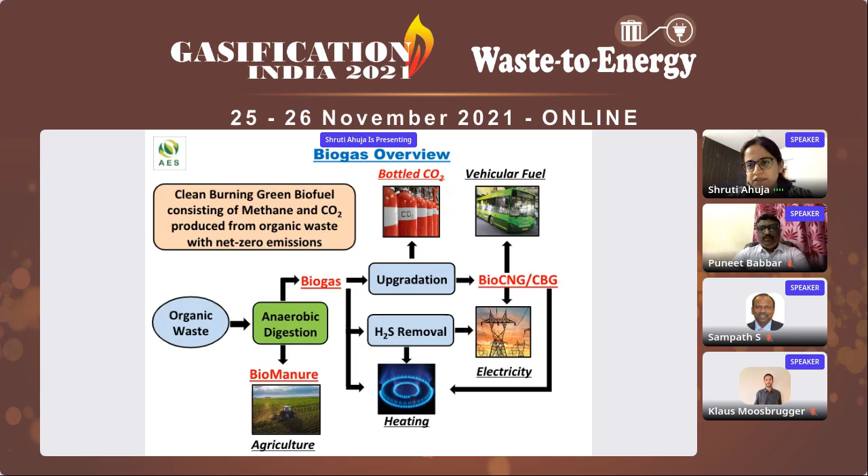During this entire conversion of organic waste into biogas, what we get is a byproduct, a very valuable byproduct, a very good value addition to this process, which is biomanure. And thanks to FCO, this biomanure, both in solid as well as liquid form, has been recognized as an organic fertilizer, which can be utilized as per norms, without any need for permissions, for agricultural purposes as well as for landscaping and various other applications that fertilizers are usually utilized for.

Now, there are various organic wastes available in our cities. I will talk about cities because I truly believe that cities are the ones who are responsible for the generation of maximum amount of waste. Our villages and I would say smaller towns are still extremely clean. They recycle a lot, and they waste a lot less than cities do.

I come from the city of Hyderabad, and we here generate at least 5,000 to 6,000 tons of municipal solid waste on a daily basis. And of course, cities like Bombay and Delhi generate a lot more, maybe close to 10,000 tons of MSW every day. So municipal solid waste, in very simple terms, is a combination of all kinds of wastes that are coming out of our homes, hospitals, institutions, offices, even vegetable market yards. Everything put together is called municipal solid waste.

Then a very interesting waste stream that is available in our cities, which is highly segregated and available in distributive fashion, is vegetable waste or vegetable mandi waste. And this is a space where we have already worked on commercial scale. So I would be very happy to show you all some snapshots of our vegetable waste management solution and how we are actually multiplying it. So this is a very important waste that needs to be treated and can in fact be treated in a much easier fashion when compared to MSW, which is highly diverse and unsegregated to a large extent.

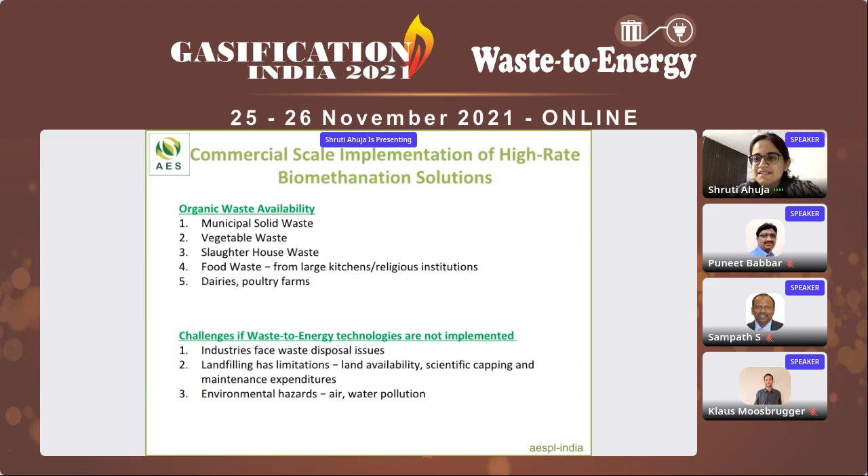I have put together a very simple presentation so that our audiences get a full gist of what these technologies can do. A little preview of what we do as a company. We are about 30 years old, and we've been into EPC and consulting. About 10 years back, we started working in this field of waste to energy and specifically biogas, and we have been doing it ever since.

We've been associated with the CSIR lab, IICT, Indian Institute of Chemical Technology. They have developed a technology which can treat a number of organic waste substrates and convert it into biogas and biomanure at various scales. What we have done is that we have licensed their technology and we have scaled it up. And now we are implementing these technologies on commercial scale.

We have about 20 plus operational plants across India, and we are working on a number of scales, a number of waste quantities. We have something as small as 100 kgs per day biogas plant to about 10 to 15 tons per day biogas plant as well. We have currently done lots of projects with food waste and kitchen waste. Again, that is at small to mid scale.

Mid scale is what we like to define as 500 kgs per day or 1 ton per day. And we have now also worked with municipal solid waste, landfill leachate at about 5 tons per day scale. About a year ago, we implemented a 10 tons per day vegetable market yard plant as well, where we treat vegetable waste and convert it into biogas power. So I will give you all a quick view of these projects, just to give you a perspective of what they really look like.

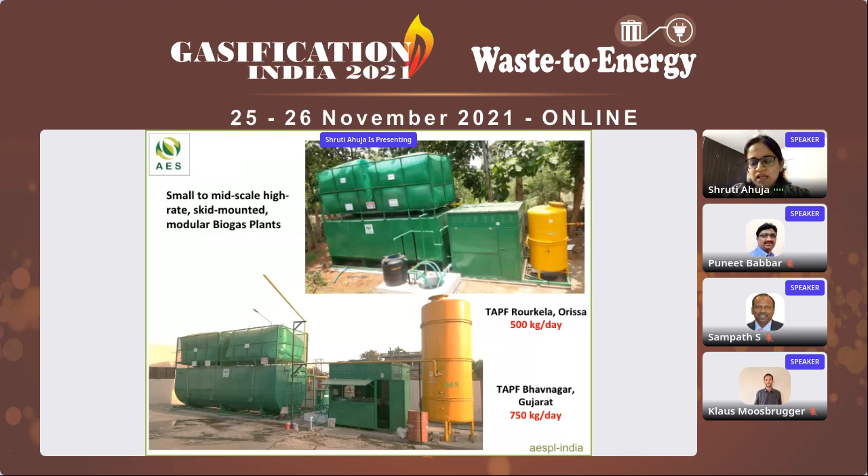Here we are treating municipal solid waste and landfill leachate on a daily basis, and we are generating biogas power. The power that is generated is being used in situ by the facility to run some electrical load like pumps and compressors and various other motors that they already have in line. These examples that I am showing you are all examples of distributive waste management.

We strongly feel this is part of the solution. I'm not saying that this is the way to go, but wherever waste is available in a segregated fashion, it really makes a lot of sense to set up these plants in a distributive fashion very close to the waste, because it results in a lot of advantages. One is your waste does not need to be transported. You are not sending your waste from point A to point B, then this dump site to the final dump site, and the final dump site then landfills this waste.

So the idea is to treat this waste in situ. If there are bulk organic waste generators, and if they are to set up their own plants, such as these, in their own backyards, then a lot of this waste, I would say potentially at least 10-20% of our organic wastes, which is now going to the landfill, can be treated scientifically through these methods.

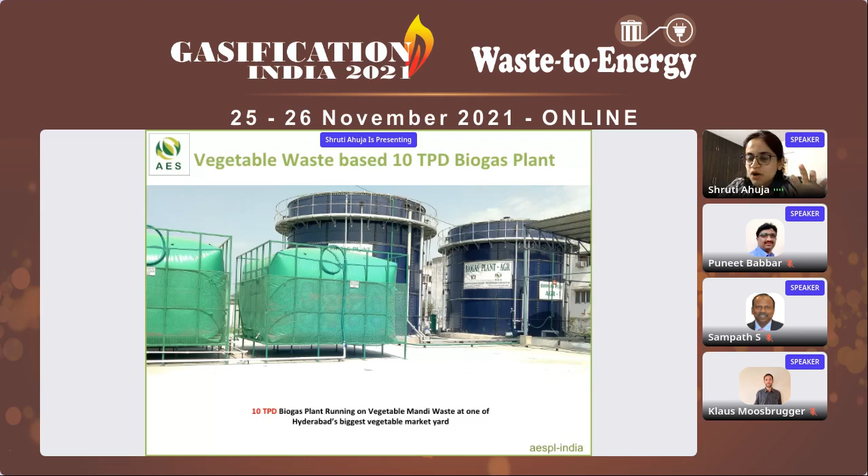And I would also like to mention that this project gained a lot of momentum and popularity because it got mentioned by PM Modi ji in his Mann Ki Baat. If I have some time, I can show you the clip as well. But that really got a lot of municipalities aware that yes, indigenous technologies exist, and plants such as these are a reality, and they can be made into a financially stable model.

Now, coming to the financial viability of these waste to energy plants, I have not put up any flowery ROI terminology here. I'm just trying to bring some very simple points forward.

Like I said, distributive biogas plants do one very important thing: they save on waste disposal cost. A lot of municipalities are already paying huge waste disposal costs to dump the waste, to take it to the landfill site, etc. This transportation, logistics, and waste disposal cost itself is close to about 2,000 rupees a ton. So if these projects are set up in a distributive fashion, very close to where the waste is, a lot of waste disposal costs get saved. That is one very big saving, which makes these projects automatically very viable.

And when I say viable, it gets you back the money. The return on investment is as attractive as 4 to 5 years, maybe even less than 4 years at certain scales.

Biogas and biofertilizer is something that I feel is like a bonus. As long as we are setting up these projects and scientifically treating our waste and saving waste disposal costs, it is already making our projects viable. So biogas and biofertilizer is something that sustains the operation and maintenance of these projects.

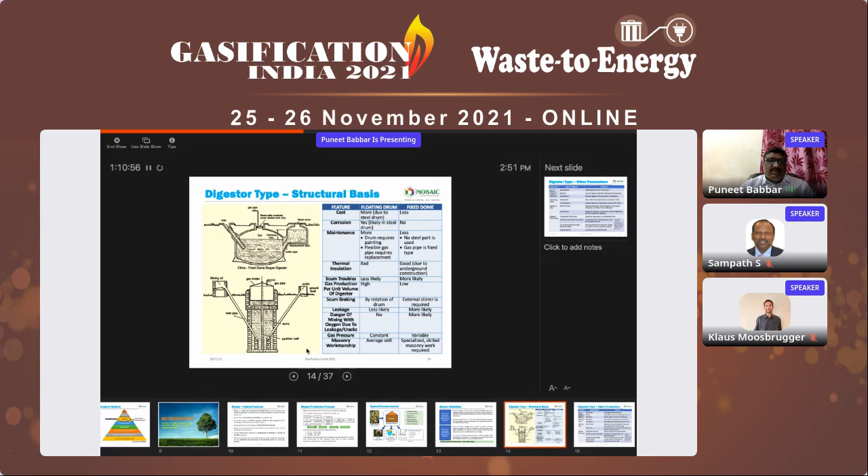If we go purely on a structural basis, we can have two kinds of digester structures: one is a fixed dome and one is a floating drum. I have given the features and comparison between the floating and fixed dome structures, and from this comparison, the fixed dome structure is always preferred compared to the floating drum structure.

If we talk about the type of digester based on other parameters like number of phases and stages of digestion, there are monophasic digesters, biphasic digesters, and multiphasic digesters. A monophasic digester has a single digester, like the basic KVIC design. Then there's a biphasic design developed by Nisargruna, BARC—Bhabha Atomic Research Centre. That technology is known as Nisargruna, which is a double digestion system where aerobic digestion is followed by anaerobic digestion. Then there's another digester developed by TERI.

It is called TEAM, TERI Enhanced Acidification and Methanation, and it is a multiphasic digester. It actually uses multiple digesters for enhanced acidification.

Based on operating temperature, we can divide these digester designs into mesophilic and thermophilic. Mesophilic digesters work under the temperature range of 20 to 45 degrees Celsius, and thermophilic digesters work under the temperature range of 55 to 60 degrees Celsius.

These are more linked to the climatic condition where we are going to deploy such kind of installation. If it is a cold area like in European countries, they preferably go for thermophilic digestion because they need to give external heat into the digester, and with that thermophilic bacteria, they can have good efficiency in terms of biogas generation and methane percentage in the overall raw biogas.

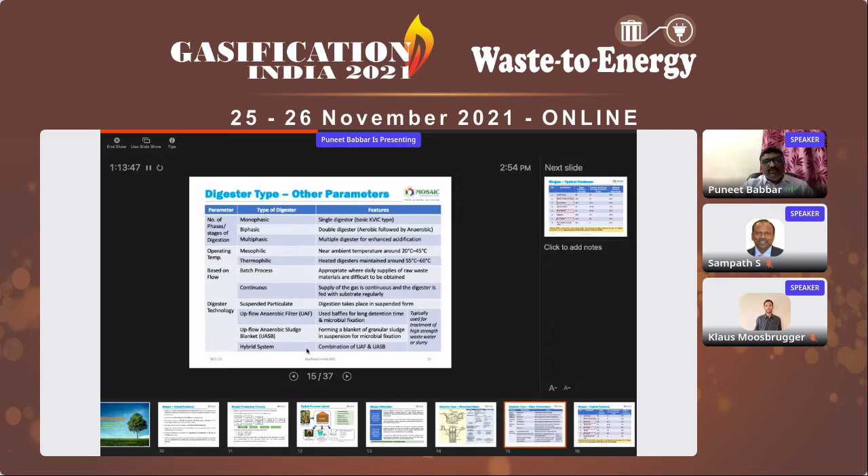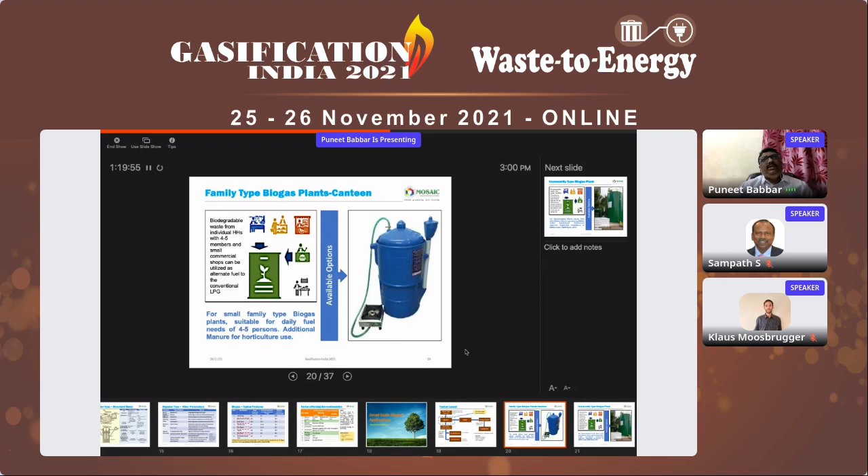For the participants who know the guidelines for Swachh Bharat Mission 2.0, it is suggesting that every urban local body should always tackle this, and they have a suggestion that they should also take care of the nearby rural areas and integrate them within their waste management solution. So these kinds of solutions, family type biogas plants, will be very beneficial at these kinds of places.

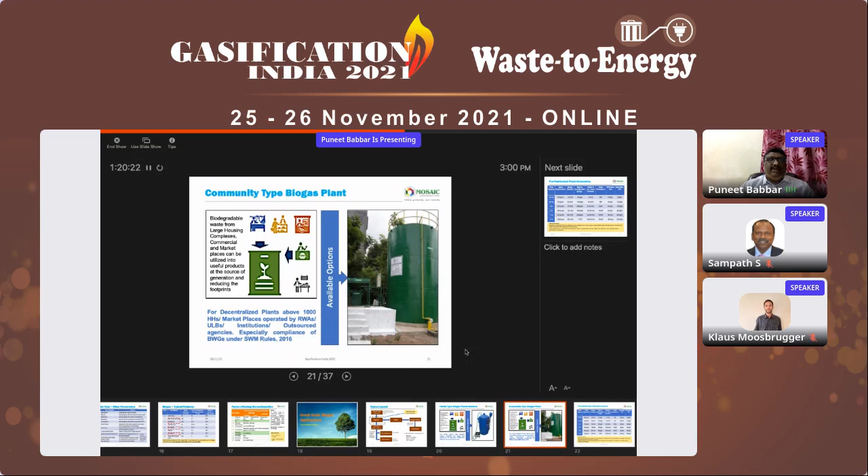Then we have some community biogas plants, like for RWAs with 1,000 households, having approximately 1,000 households, large institutions, especially bulk waste generators as per SWM rule 2016. Municipalities can explore such installations at these kinds of places.

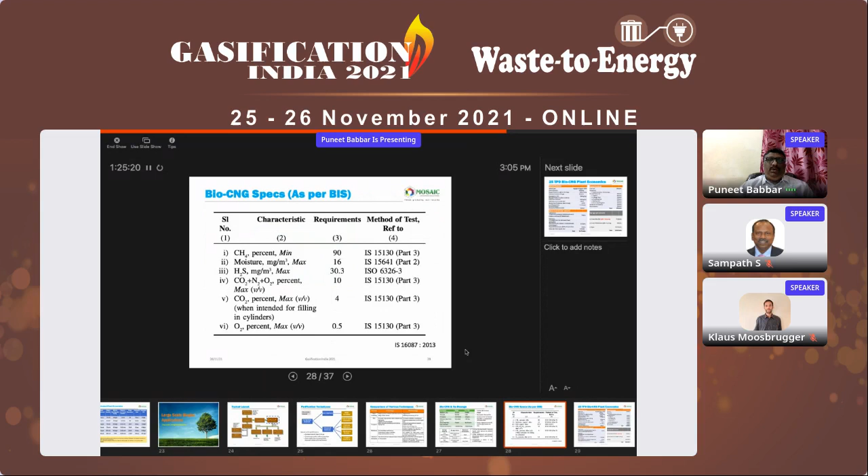This is the specification given by the Bureau of Indian Standards for the use of bio CNG specifically, as per IS standard 16087 of 2013. This sets the minimum percentage composition of different constituents in bio CNG to be used as an automotive fuel or for power generation.

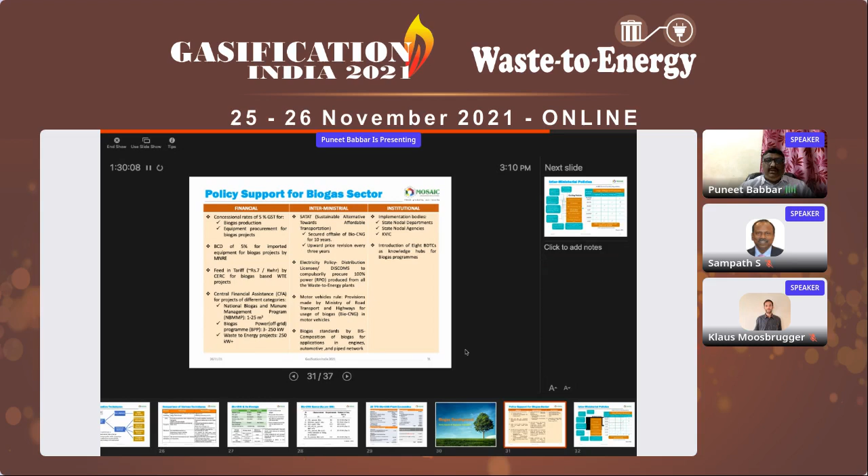Biogas standards have already been notified in 2013, as shown in my earlier slide. Institutional support is given by the ministry through state nodal departments, state nodal agencies, and KVICs, and of course BDTCs, biogas development and training centers, act as knowledge hubs for this biogas program.

So it's a very good convergence if you see. No other technology apart from biogas, like if you go for composting, pyrolysis, gasification, maybe thermal installations, has so much of convergence with so many interministerial policies. So this is a very good step for the development of this particular sector in our country.

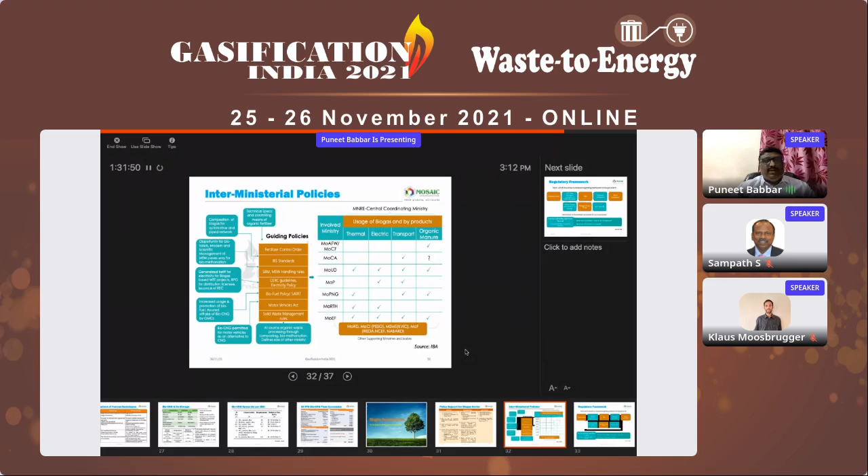And there are some other supporting ministries like Rural Development Ministry, which came up with this Gobar Dhan Yojana under SBM Rural. So that has also been a kind of a convergence for these kind of plants. Then Ministry of Chemical, small and medium enterprise, Ministry of Finance, and some institutes, IREDA, NCEF, NABARD, which provide support on these kind of installations.

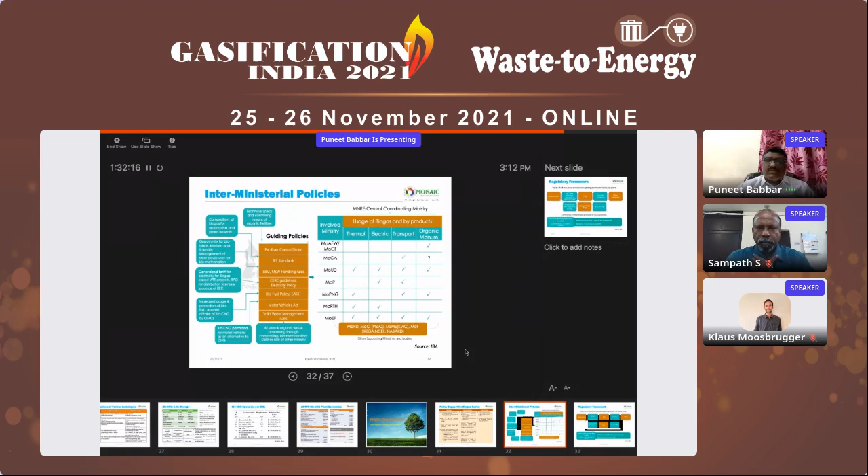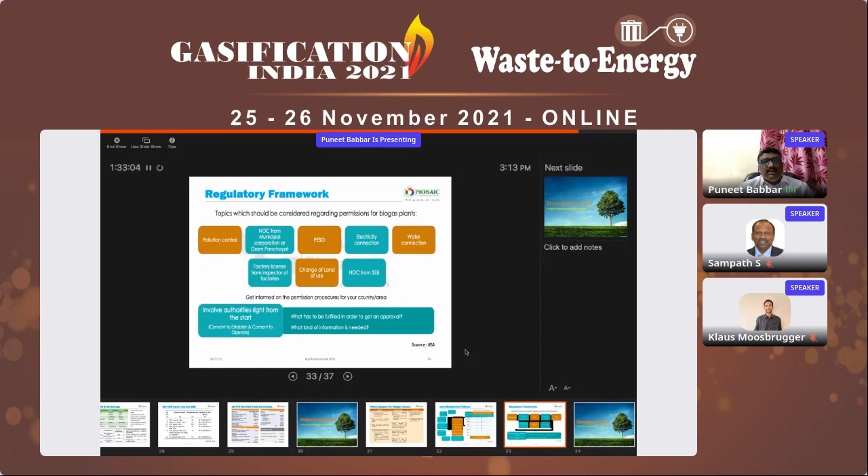So now quickly I am concluding my presentation with 2 more slides. As per the work we have done in the last few years on different kinds of solutions and technologies for biogas plant installations, I have come up with some strategies for the urban local bodies on how to structure these kind of projects.

As per our understanding, it should be a 3-tier strategy, because ultimately, as I said, source segregation is the key to the success of these kind of projects. For the ULBs with more than 1 lakh population, most of the ULBs after this Swachh Bharat Mission are going for source segregation. They are achieving the targets for source segregation.

But it cannot be achieved from day one; if you go for implementing source segregation, it will take 3 or 4 or 5 years to achieve 100% segregation. So as part of the 3-tier strategy, we suggest that in the first stage, the ULB should start with biogas solutions at the household level, where individual households or some rural areas connected to the urban local body can directly use their daily organic waste in family-scale biogas plants. Small prefabricated units are easily available in the market.

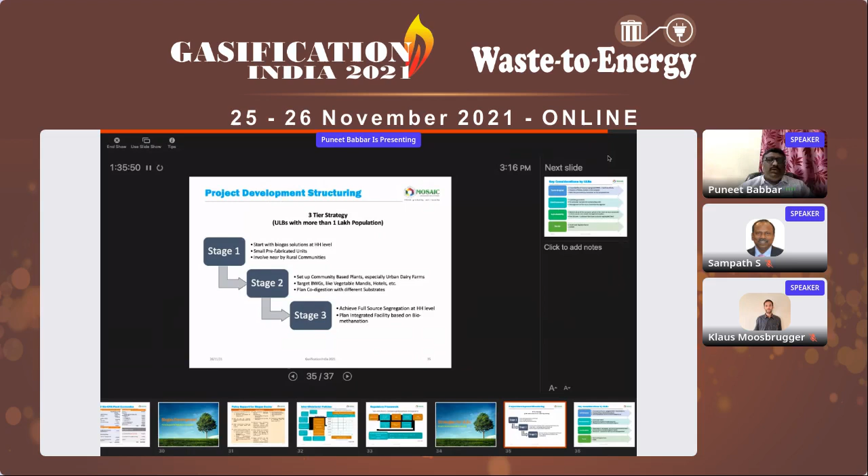So these kind of solutions can be explored in stage 2, and in stage 3, when the ULB has achieved the full 100% target of source segregation, they should go for planning an integrated facility based on this solution. Key considerations, last slide, I'm just concluding.

Looks like Babbar is having some internet connectivity issues. Puneet, can you hear me? All right. So with that, I would invite Mr. Sampath to take the center stage and start with the presentation. Whenever Mr. Babbar gets his connectivity back, he can come up with the concluding remarks.

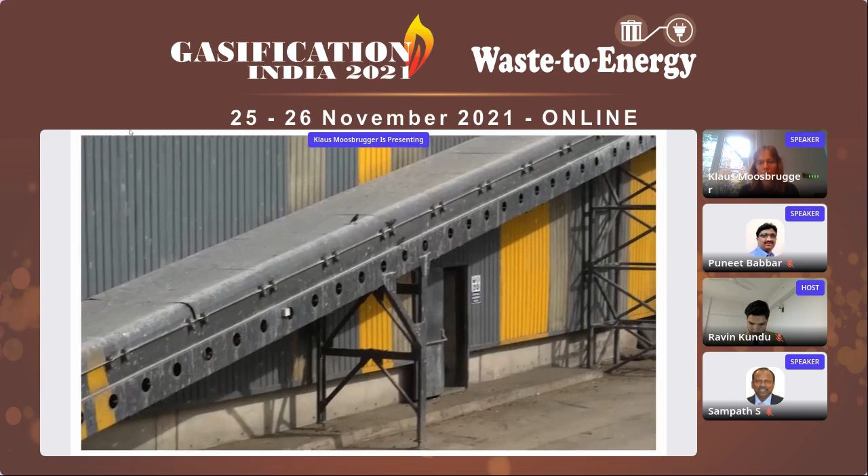It is transported. It's a big volume, so it's a big plant actually. And there you see the pulp. So this is the mixture of the organic fraction of municipal solid waste in the bunker mixed through.

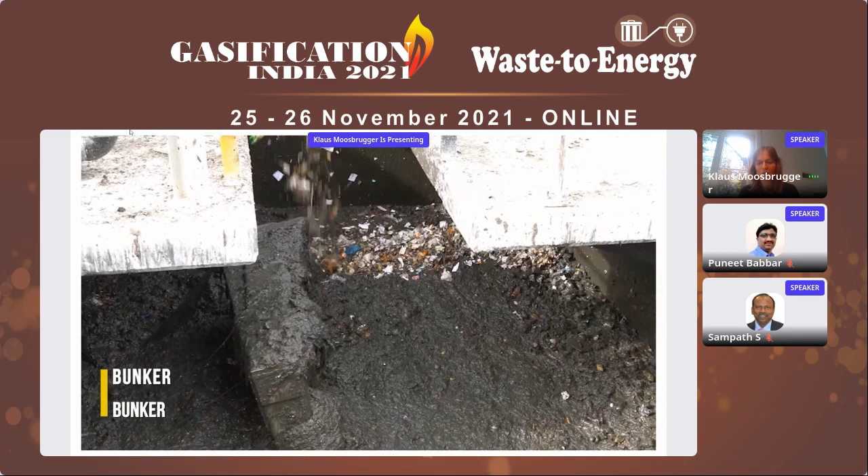And this pulp goes to the dry digesters. You see them here. Each one has a volume of 4,000 cubic meters. So this is definitely big scale waste treatment here. They have one mixer inside.

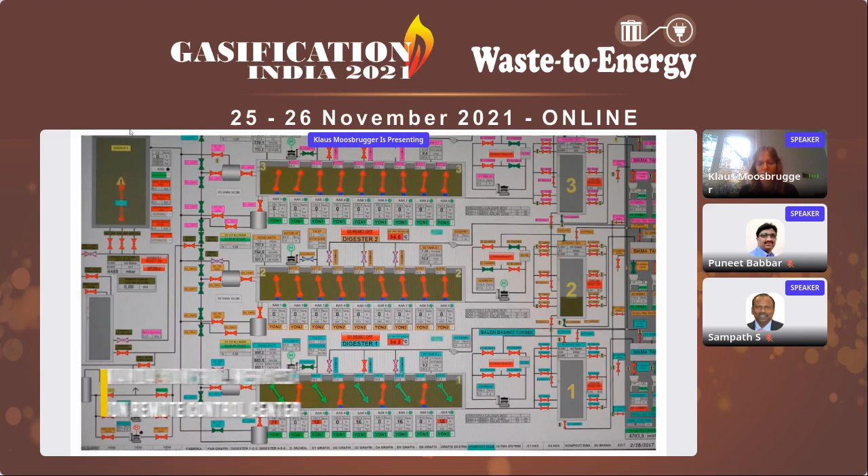And the biogas produced from dry digestion is then collected in gas holders, cleaned with biological desulfurization, and then put to a CHP unit where electric and thermal energy is produced. The whole plant is run by a remote control center.

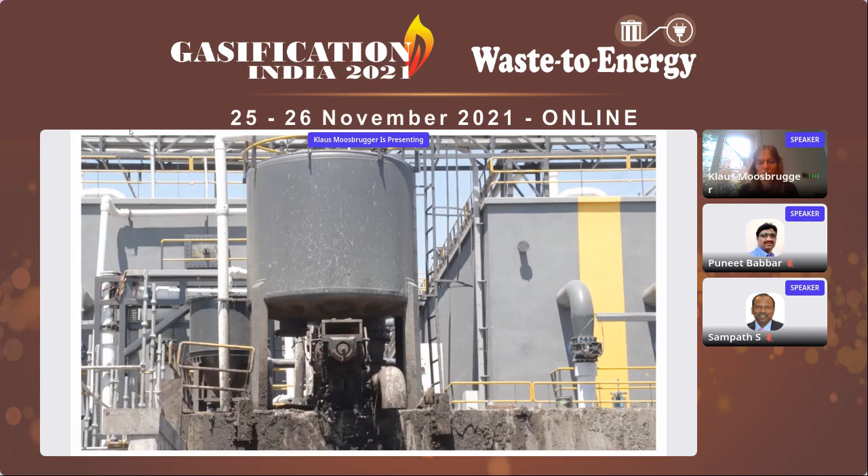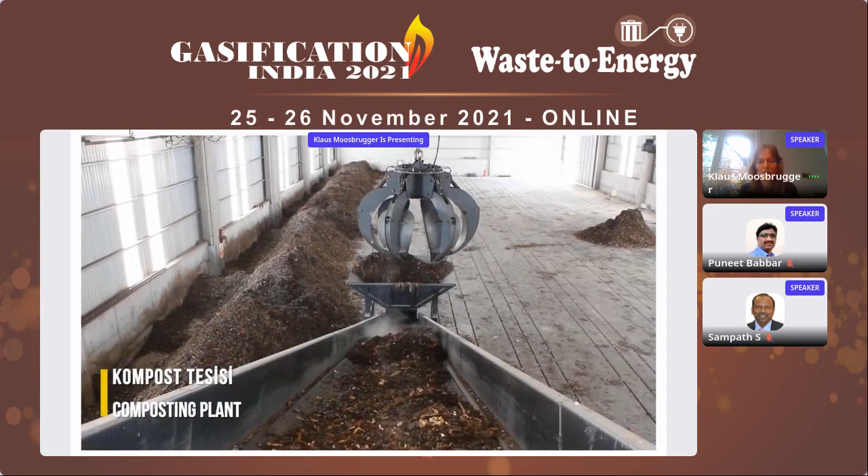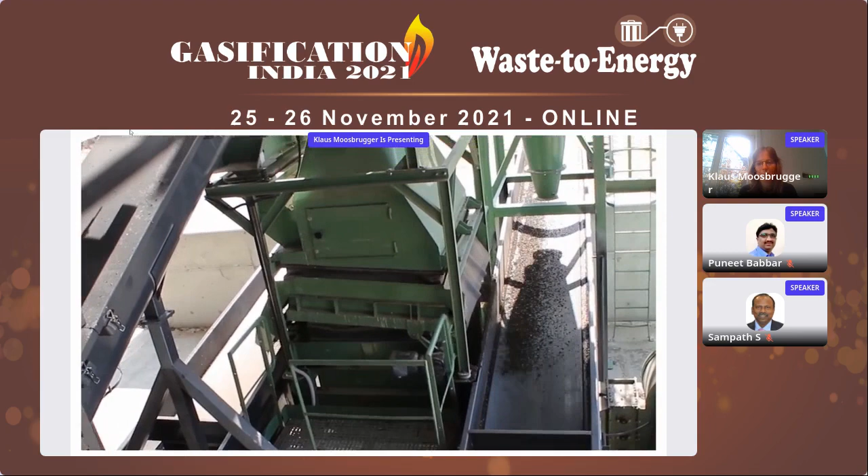The product, the digested material, which comes out of the digesters, you can see this here. It goes through several steps. So the first separation gives a cover for landfills. The second separation step then gives compost. So we also have one composting plant. You see here impurities getting sorted out to get clean compost.

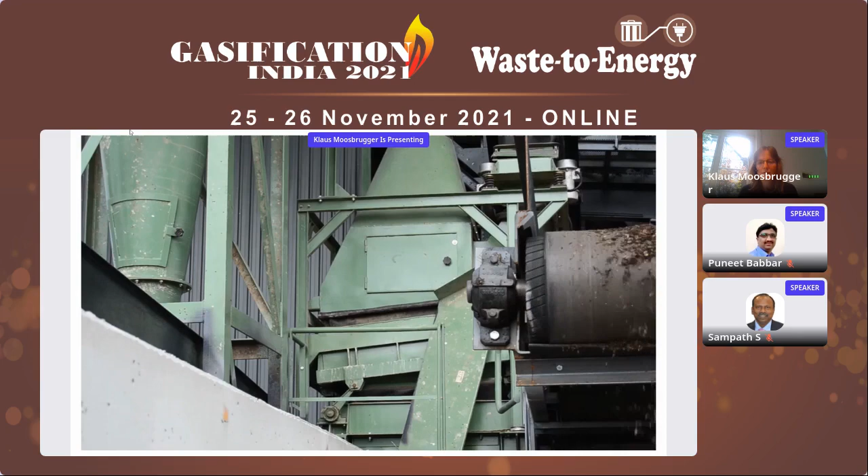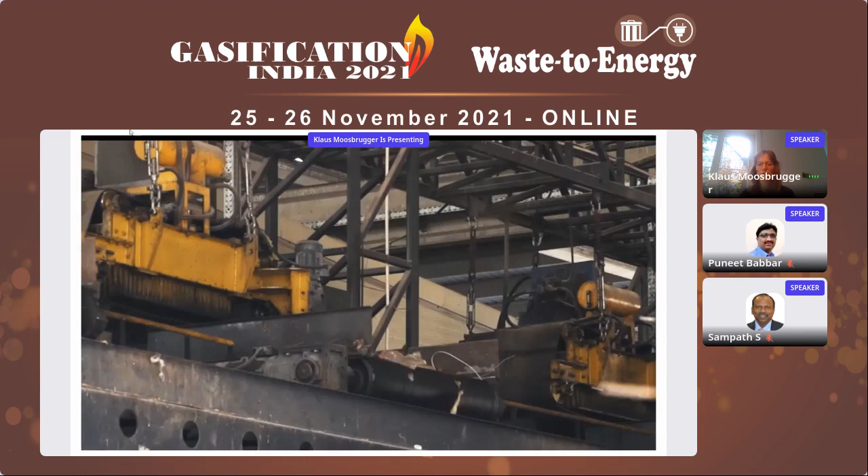This is the other fraction from the sorting. So there's one line for recyclable waste, light plastics or plastics with more value are sorted out and then recycled, reused in a separate plant. We have a pressing line for good organization and transport of the recyclable waste.

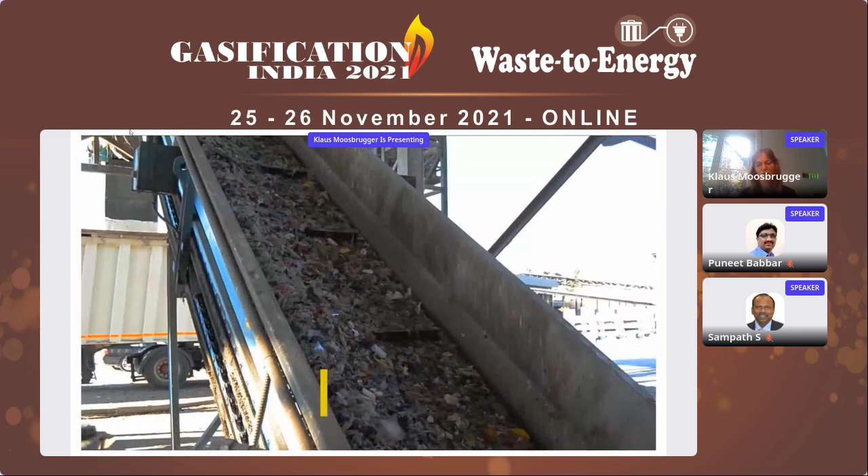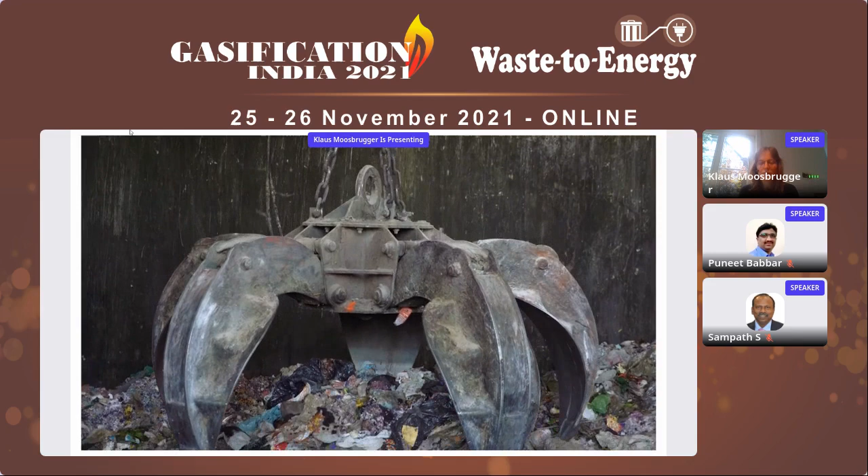RDF is another fraction, quite an important fraction, I would say, because RDF is the part of the waste which can then be sold. In Turkey, it is sold to cement industry. The price is 15 to 20 euros per ton, just to give you a quick idea. Then we have one fraction which goes to gasification, incineration. And by sorting out this fraction, you have the right calorific heating value for good incineration.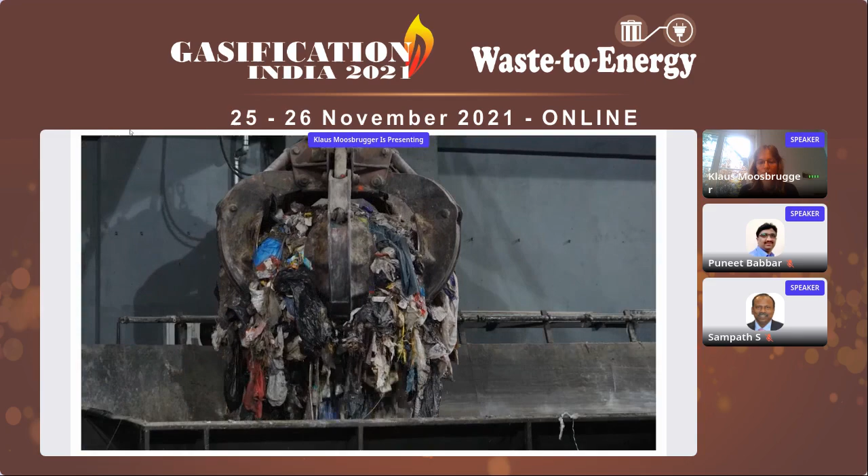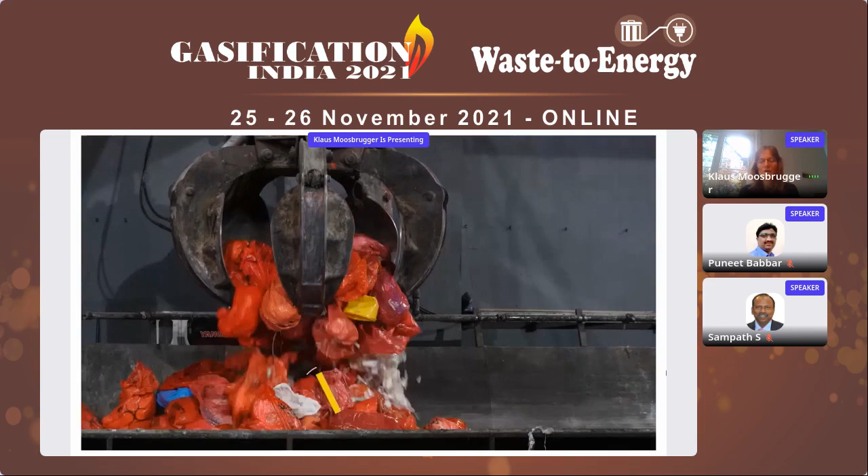This is the incineration plant, which you can see. Also, we have one more field of business, which is medical and hazardous waste. And this also goes to this incineration plant. In fact, I would keep going with my presentation now, as this is not the main focus of this session. I want to talk more about MSW treatment.

And the gas production, which could be collected of such a sanitary landfill then, for 2,000 tons per day with 50% organic, would be ranging from 3 megawatt in the first year or starting year up to 12 megawatt if feeding is constant. And to show you what that means, 12 megawatt is around 6,000 cubic meters per hour biogas, landfill gas, with an assumed very conservative amount of 50% of CH4, so this gives 3,000 cubic meters per hour biomethane.

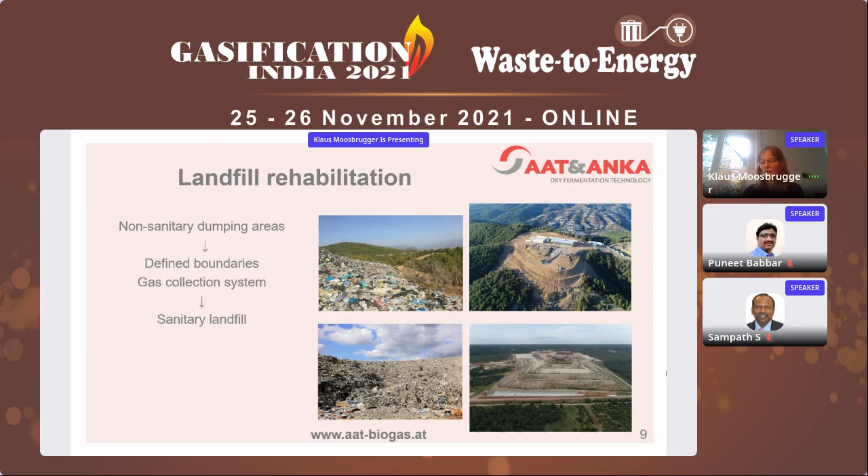Another field of our business is MSW treatment, also an important point of this session today.

I want to show you quickly the process. We have the solid waste coming in, municipal solid waste, and we have a mechanical sorting plant, which is very important because if the organic fraction, as we saw in the previous presentation, is higher than 45%, it's not good for incineration, or the incineration is not very efficient. So it's definitely an important step to do this mechanical sorting, separating the first fraction, the biodegradable organic fraction, which then goes to the dry digesters as we have seen in the video. From there, biogas, biomethane, compost and fertilizer can be produced. So this is the first fraction.

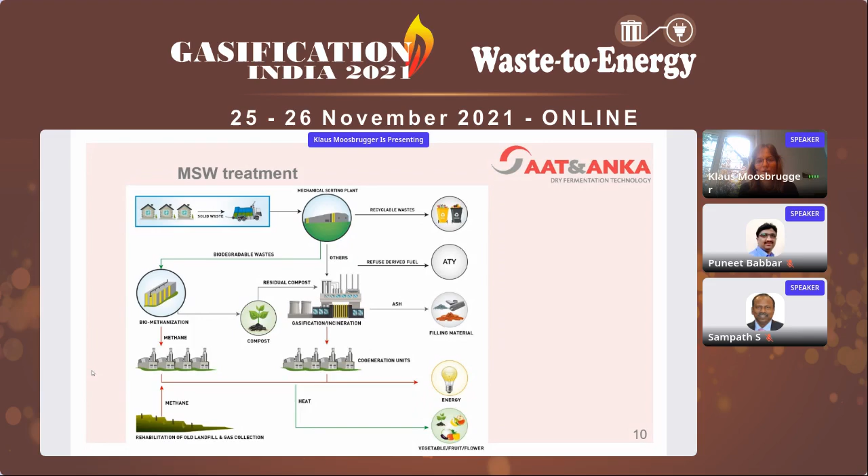The second fraction is recyclable wastes, plastics, which can be recycled. We have the RDF, refuse-derived fuel, which can go to the cement industry and be sold, so you usually have an income from that fraction. The rest of the waste has the right calorific heating value for incineration. So in total, this concept is as much circular economy as possible, to get a proper treatment of the municipal solid waste.

I have a few more photos for the sorting.

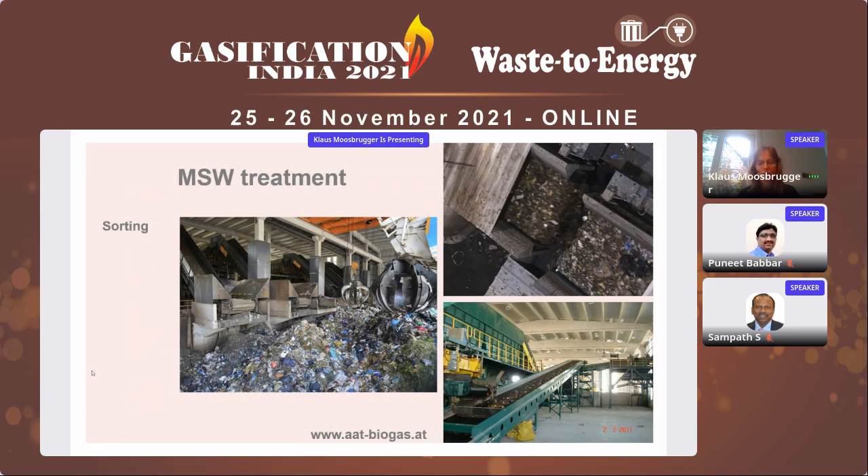Dry digestion: as I said before, one digester has a volume of 4,000 cubic meters. It has a continuous plug flow, so the waste is slowly pushed through the digester with a slowly running agitator. The digested material afterwards is separated, and process water can be recirculated. The biogas produced is cleaned and stored. So this dry digestion technology is the only technology which can treat wastes with higher dry solids and a high concentration of impurities.

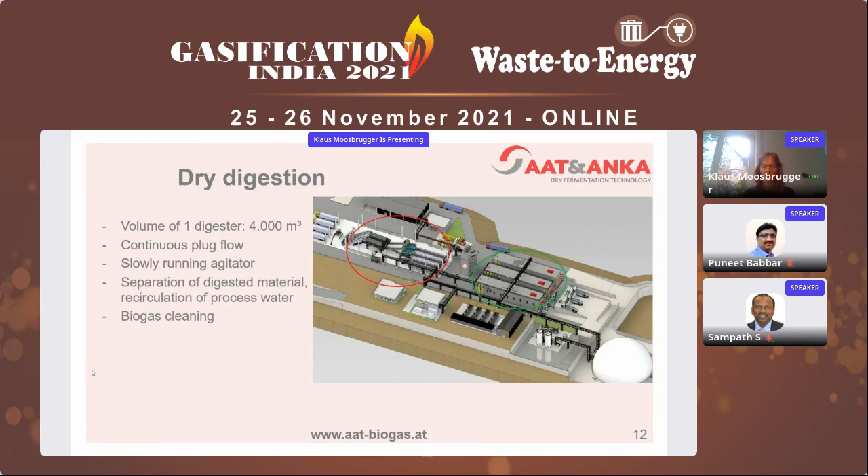Digested material at the end of the process is separated into a solid and a liquid fraction. In the first step, the solid fraction is used to cover landfills in our cases, and the liquid fraction is separated in a second step. The solid fraction from that second step can then go to composting. The liquid fraction is recirculated to dilute the process and also used as fertilizer after analysis of heavy metals, for example.

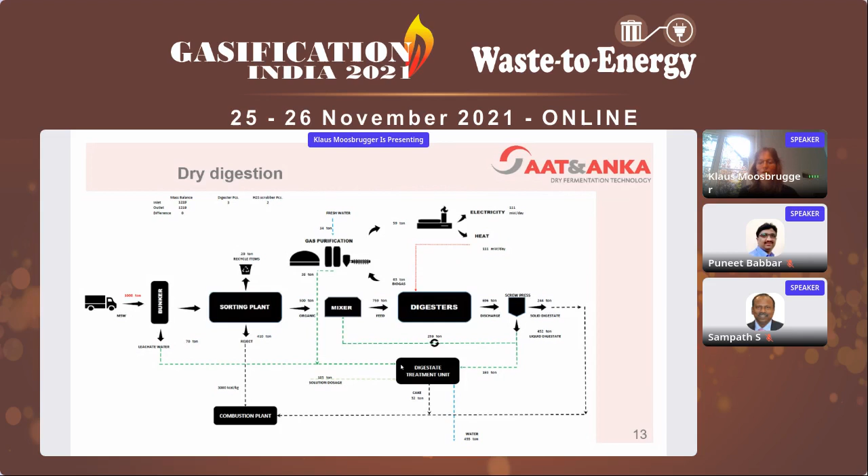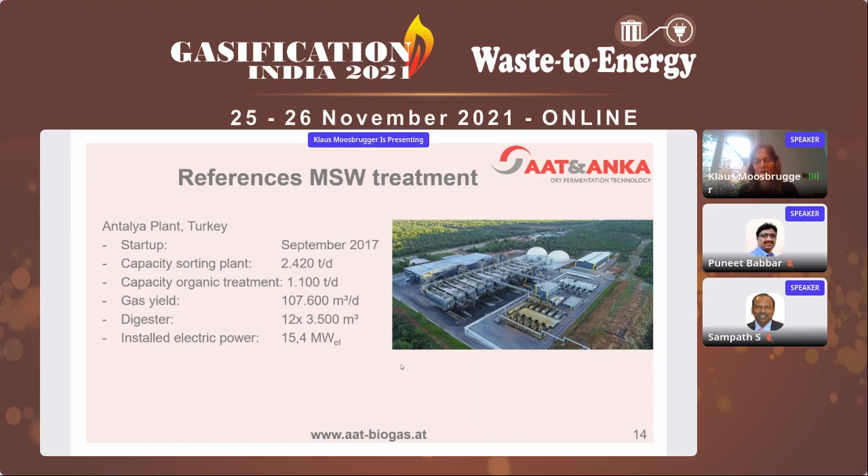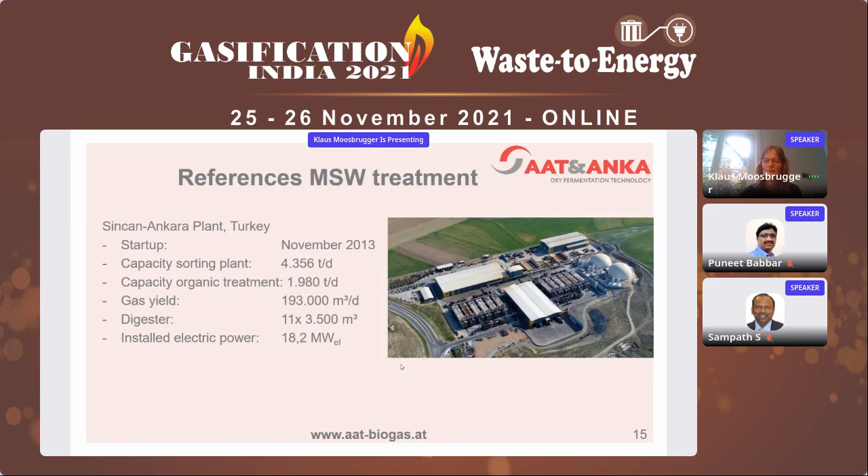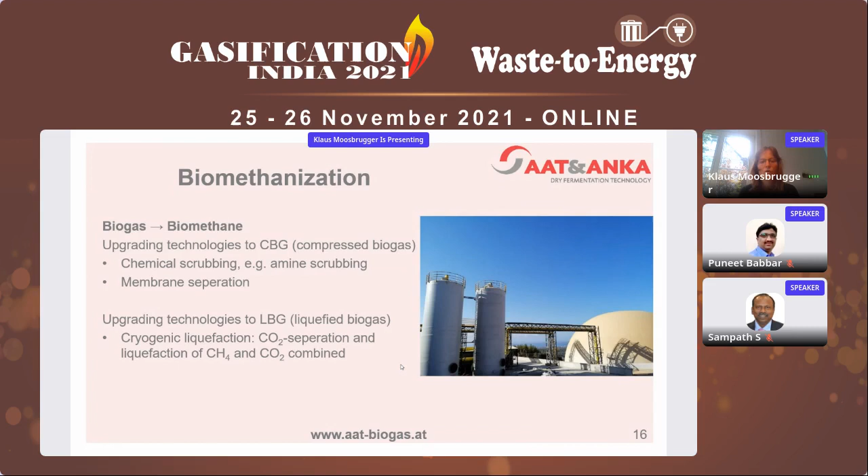A few more slides for biomethanization. I don't think I have to go too much into detail because the other presentations already included that. If you want to make biomethane out of biogas, you have to upgrade it, separating the CO2. This can be done by chemical scrubbing, membrane separation, just a selection of technologies. The output can then be compressed biogas or liquefied biogas, depending on the usage. Usage of biomethane includes replacement of natural gas in the gas grid, fuel for CBG or LBG vehicles, or direct use in industry.

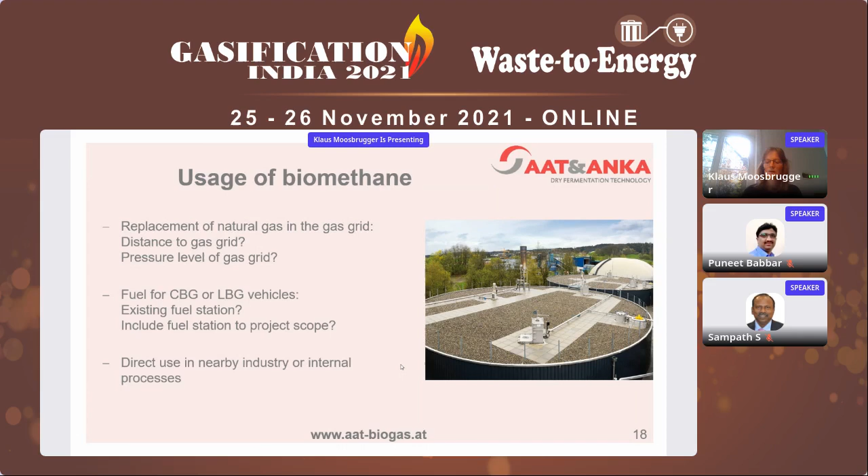Thanks a lot for your attention, and I'm happy to answer any questions. Thank you.

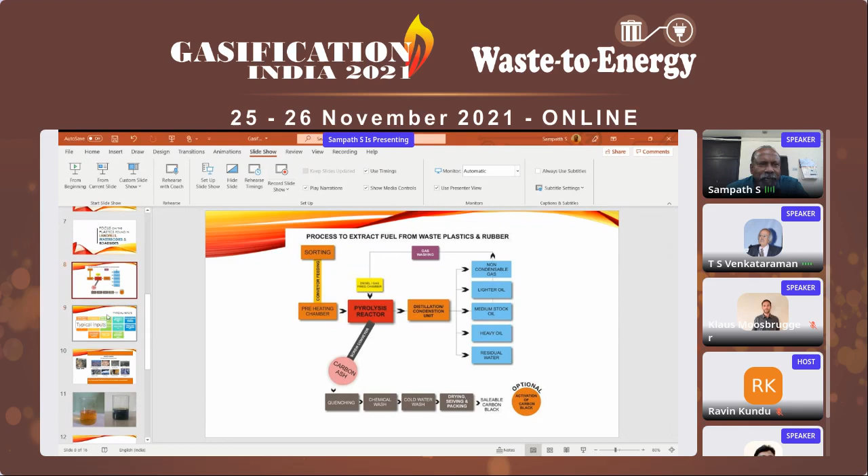I'll quickly go to this slide, it's not moving, some problem with this slide. Anyway, typically we can process any kind of plastic waste dumped from municipal waste, whether fresh municipal waste or landfill waste, especially the composites normally found in landfills. So that can be recycled, and the main thing is the thermocol, polyurethane foam.

Then you can talk about the disposable cups, which are micron thickness, and the adhesive tapes, which are very difficult to clean and then reuse. And some of the automobile parts, which are dirty and heavily contaminated, heavily printed - these are the kind of materials we process in the pyrolysis plant.

The concept is like a cooker where you put your plastics and heat outside the cooker, and the plastic melts and becomes gas, and the gas comes out. We have two kinds of gas: one is condensable gas, the other is non-condensable gas.

The non-condensable gas has the same property as LPG, and we use it for heating the vessel. The condensable gas gets condensed into oil, and if you distill the oil, it comes close to diesel. The residue is carbon black because there's no oxygen inside, and the carbon black is rich in carbon, so it can be used for burning, as colorant, or in the masterbatch and paint industry. The whole process takes around 450 degrees centigrade, and the gas used for heating is heated to around 1000 degrees centigrade, and most of the toxins die when we heat to 1000 degrees centigrade. Because of that, there are no emissions.